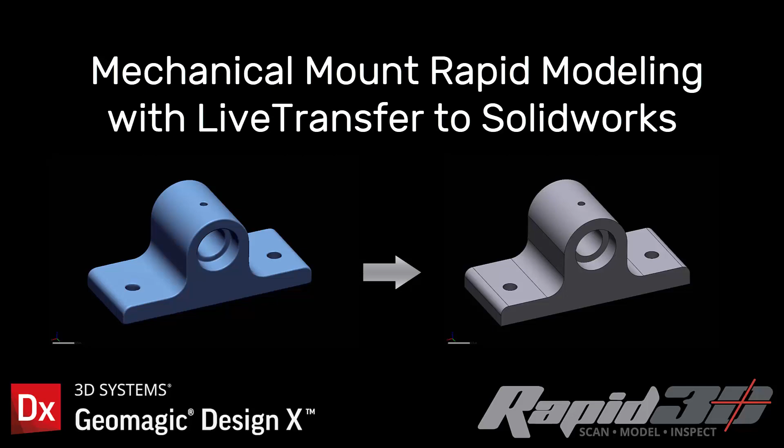Hi, I'm going to show you a rapid modeling procedure here on a mechanical mount, utilizing a lot of the wizards and features inside of Design X that really help us accelerate the reverse engineering process.

Right now we're extracting regions, which are geometric groups, similar groups that allow them to be selectable, so planes, cylinders, and so on.

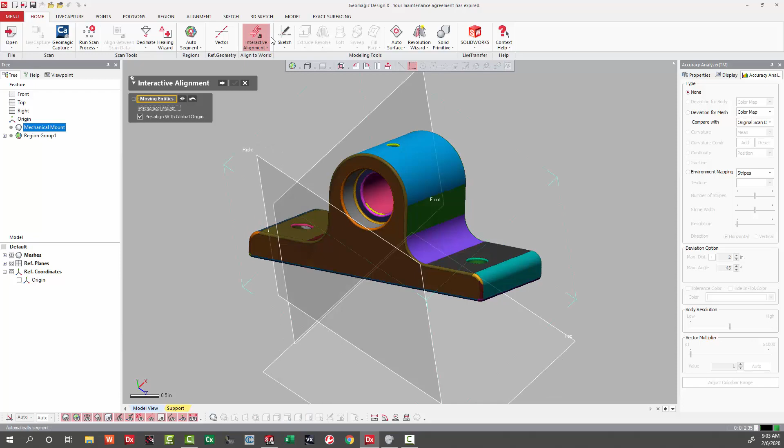Then we're going to use that to apply an alignment, so the origin position is at the intersection of the bore with the face. Set our Z normal upward and Y from the front face. Now you can see that we have an alignment completed, which is a required first step.

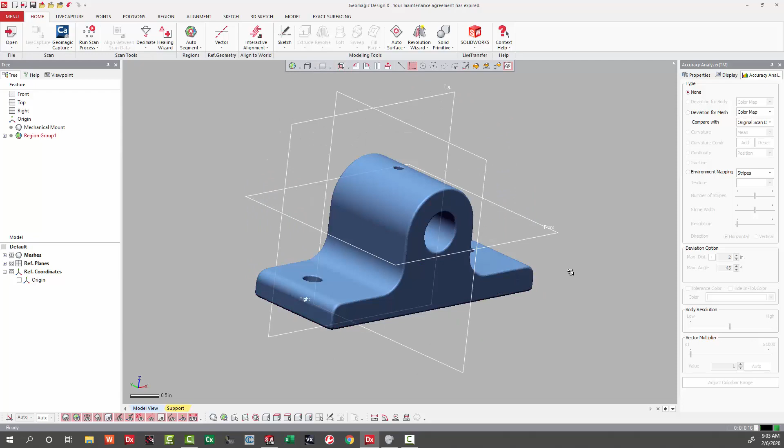Then we're going to utilize an extrusion wizard. Here we're going to select all the side faces, basically the regions that make up a geometry. For the top, we'll pick one of the main planes. Pick the bottom, we're going to specify the extrusion direction to be perpendicular to the top plane and also require the sketch to be on that plane.

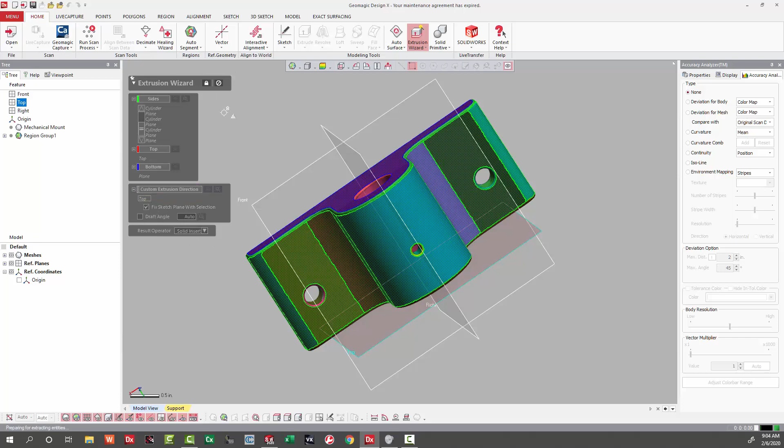We'll go next. And we can drop our resolution, exclude fillets, and reduce our fitting just so we don't get any small faces and features. We just want the main shape. You can see there, I applied that nicely.

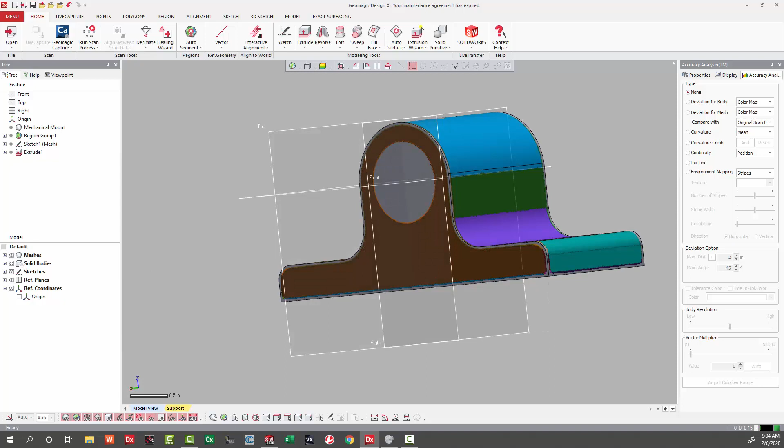I am going to create a vector at the intersection of the two main planes, and I'm going to use that vector along with the Revolution Wizard to revolve cut this bore. I'm going to specify the vector and also the sketch plane, and set this to solid cut.

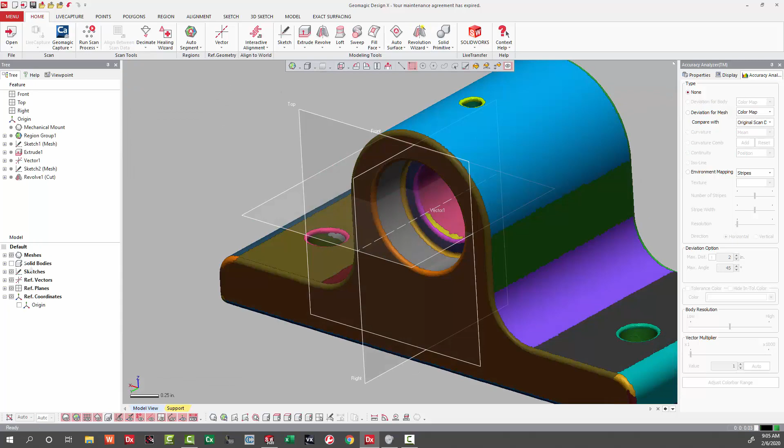Here we'll drop our resolution and our fitting and exclude fillets just so we get the simplified shape. We can add fillets later. So now that's good, I'll hide my vector. So now all I have to do...

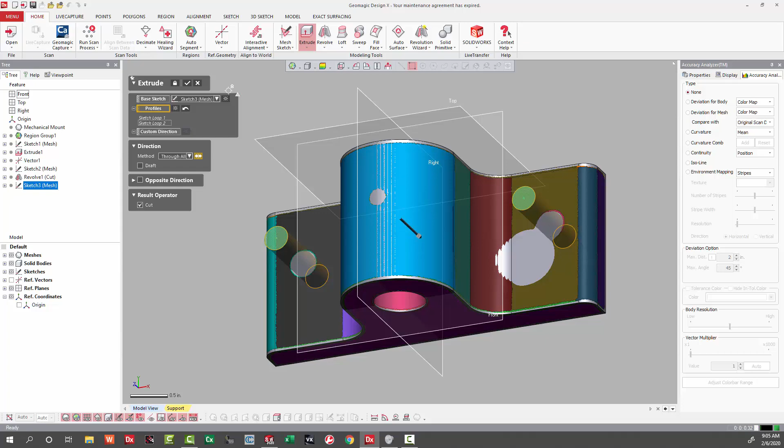...the mount holes, and we use our mesh sketch feature, a little bit more manual, but still very powerful. Double click on the pink polyline, fits the circles. We'll set this to extrude, and we'll do an extruded cut through all. And then one final circle.

Now this I require to be aligned with the origin, so basically on the part midline, and I'll use a constraint line, constrained to vertical for that.

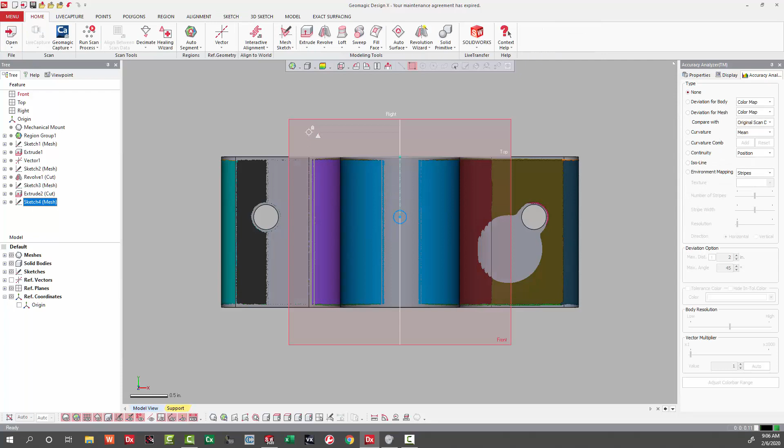So there we go. Now I can use our accuracy analyzer to measure the deviation between the scan and the solid I created. And this is plus minus 4 thou, so everything is actually quite tight.

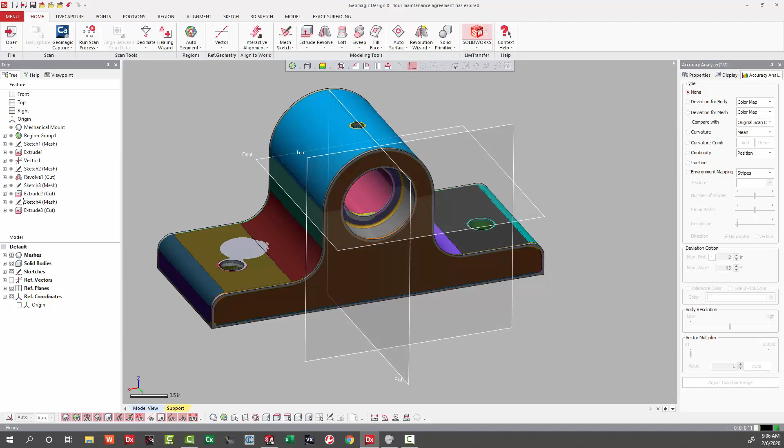Now I'm going to do a live transfer, which is a parametric transfer to Solidworks. You can see here that it's recreating our model feature by feature in Solidworks, fully parametric, with sketches.

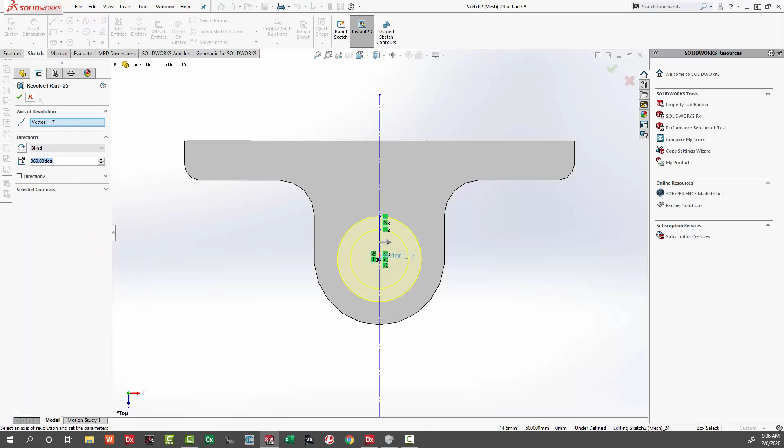We can edit features, edit the extrusion directions, and continue our design from there. Thanks.